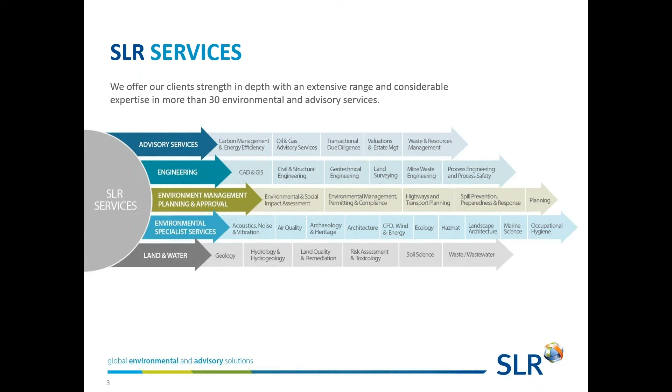So, safer by sharing. The aim is to share our experiences of providing support, in particular in the restoration phases of quarrying. So restoration design to reduce hazard and risk, whether that's landform, surface features, land cover, habitats, water bodies, and then after-uses - ecology, agriculture, forestry, recreation, waste, built environment type after-uses - but also to think about management of those construction and landscaping works, again to reduce hazard and risk. So typically earthworks, soils, compaction, cultivation, seeding, planting, fencing, etc.

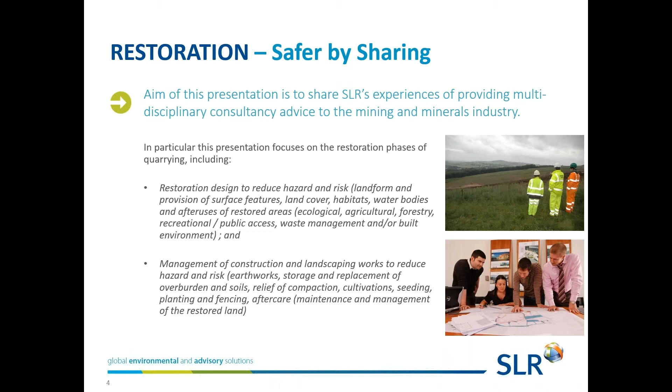As a starting point, the National Planning Policy Framework requires mineral planning authorities, when considering mineral extraction proposals, to ensure there are no unacceptable adverse impacts on other things, human health or aviation safety, and that there's provision for restoration and aftercare at the earliest opportunity and to the highest environmental standards.

That policy is transferred into local plans and decision making by authorities, and all of the mineral workings quarries have a planning permission to work, and that planning permission will either specifically mention a restoration scheme, or there will be a condition attached to the permission that says the site needs to be restored in accordance with a scheme to be prepared, submitted and agreed.

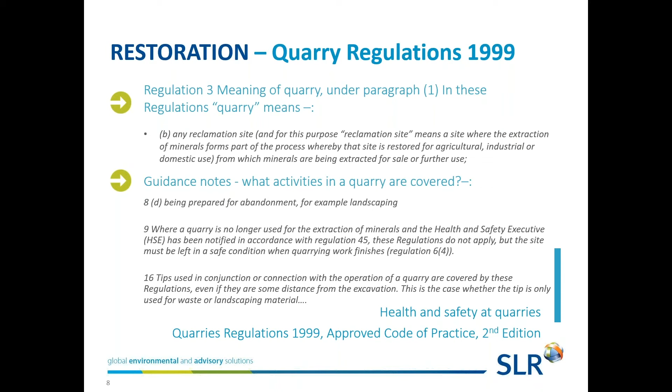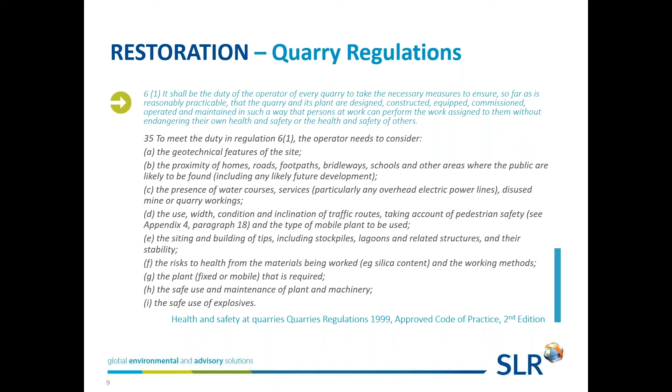So it's clear that restoration is covered by these things and needs to think about these things. It's helpful, and in preparing this presentation, I wanted to frame it with the regulations in mind. There's reference here as to what the operator needs to consider: geotechnical features, the proximity of homes and footpaths where the public are likely to be, presence of watercourse and services, traffic routes, pedestrian safety, building tips, the use of plant and machinery. We'll come on to those in the next couple of slides.

Restoration planning, design, implementation - it's a complicated, multidisciplinary, team approach. Health and safety is one thing we're going to talk about today, but actually there's lots of other considerations and input from specialists, whether that's the geotechnical engineers, or it may be ecologists or soils.

It may be the public generally, the local planning authority, the landowner or adjacent landowners, as well as the operations and the project management side.

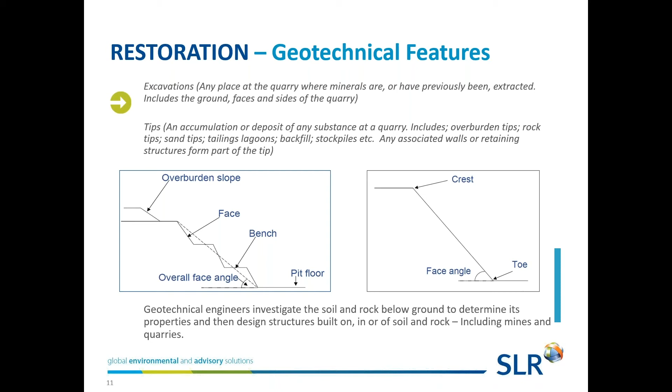Geotechnical features, as mentioned in the regs, include excavations of the quarry and how do we restore that, and then the tips, which might include overburden and solid tips, but also lagoons as well. The regs are clear that geotechnical engineers need to be involved and consider the properties and the structures.

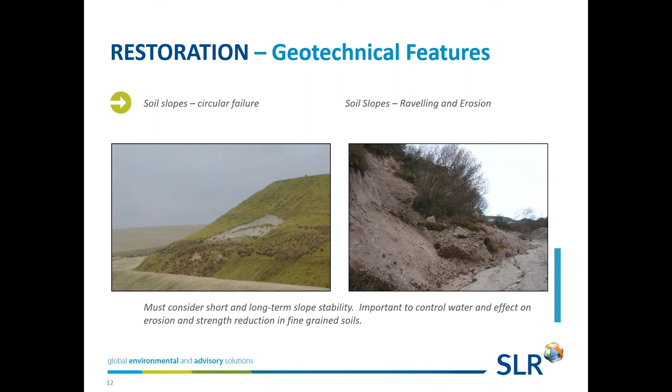Both of slopes, but also faces, benches, and the crest and toe, face angles, etc. So in terms of not just the quarry, but the restoration phases, we need to consider long-term stability as well, not just while it's operational, but as the site is abandoned and handed over to a beneficial use. What's the long-term stability? That's considering circular failure, raveling, erosion of slope.

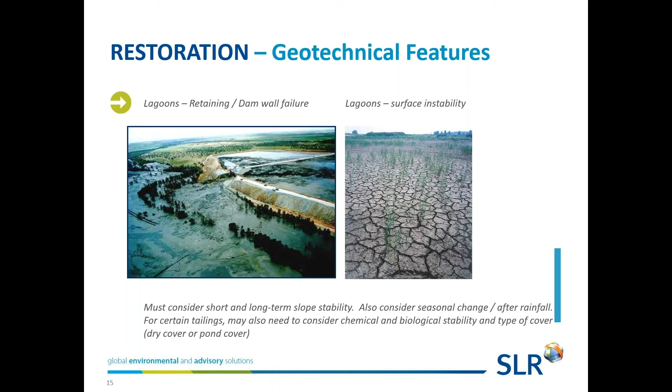Lagoons, again, if there's a retaining or a dam wall, if that fails, again, in the long term, consideration of that, and then the surface of the lagoon itself in terms of stability, and how those things may change as well over time or during the seasons.

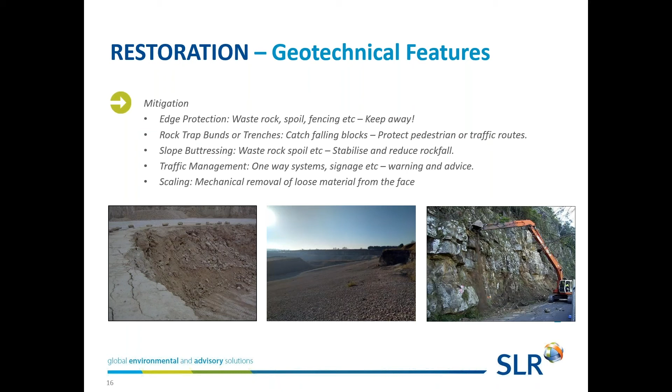There's mitigation during the working, which may include edge protection, rock traps, buttressing of slopes, traffic management, scaling, and it may be that the restoration phase as well is incorporated into the scheme as a whole.

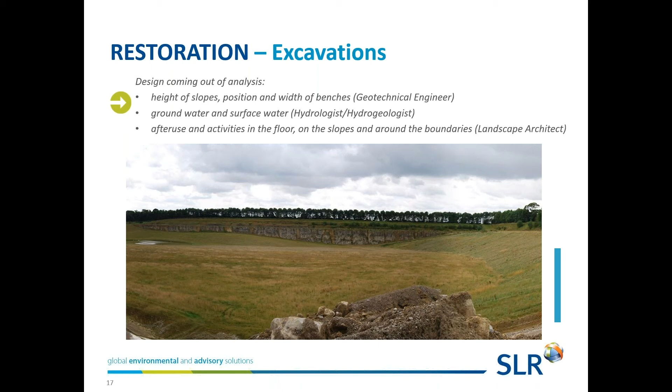But where we have got the exposed faces, perhaps there isn't a footpath, or there isn't something beyond there, and therefore it was less of a risk to have that open. That sort of thought process and discussion within the team would help to identify what material goes where and what's considered more important or more of a risk.

So for hard rock faces, final restoration blasting is often considered and put on the table as an option, particularly in visible sites, or a national hard rock quarry in a national park, which is quite visible. The idea being that the production faces are broken up, and the regular banding, the appearance of a quarry, is reduced. It becomes a more naturalistic hillside.

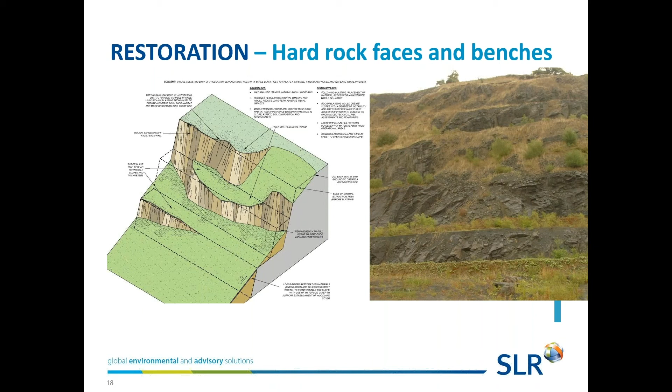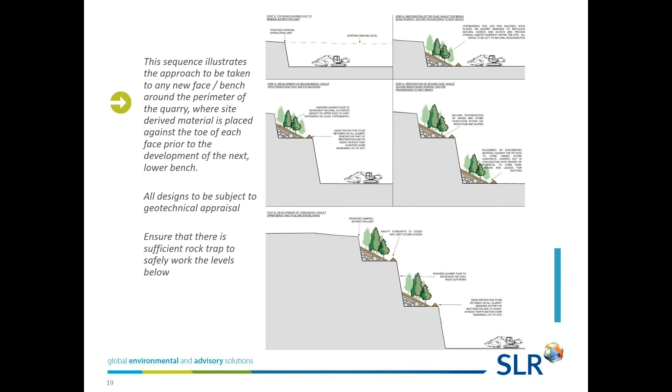The first bit would be the first bench. Step 2 would be to place material against the worked-out bench. Once you're at the boundary, step 3 would take the next bench down, then placing material again, and then the next bench down. This is a more controlled way of delivering restoration while minimizing the land take.

So the disadvantage, and again within a multidisciplinary discussion, is the appearance of more regular banding. It's more obvious that it's a quarry.

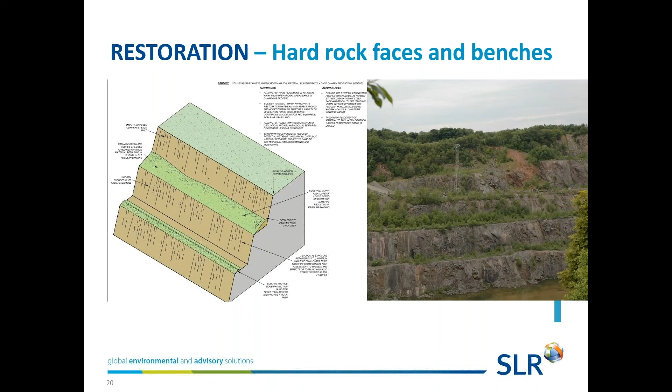It may only be a temporary thing of visual consideration as well. The advantage with this is that the rock traps all remain in place.

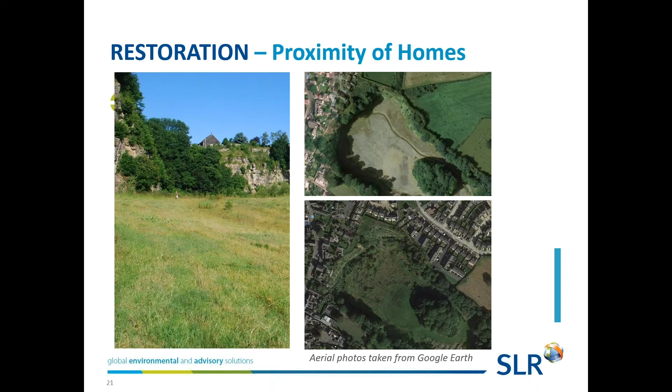Did the housing development consider that there was a quarry there with quarry faces, and how were those hazards and risks taken into account? So there are questions there.

The other situation I was reminded of was from the BBC News website. There was a housing development put into the bottom of a quarry as part of a built environment restoration. It's not one of our jobs, but we'd seen the news reports.

After heavy rain, there was a landslide of the quarry faces and the gardens were buried in mud, as reported. There were no injuries and the houses are still there. But clearly, when putting housing development either at the top or bottom of faces, there needs to be consideration of long-term stability, the hazards and risks, and mitigation measures.

The regs talk about how, as part of restoration, diverted footpaths may be reinstated through parts of the site, quite often with rights of way that the local authority will want back on the same route. And of course, the landscape will have changed, even after it's restored and soil has been spread in the bottom of a working, an excavation, or over a tip.

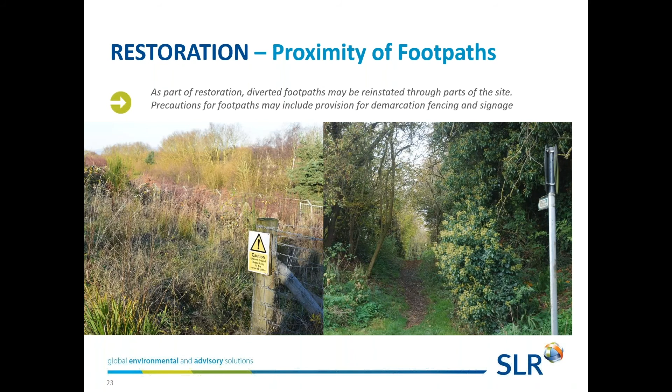There may be some new hazards in faces and slopes that weren't there before. So how do we manage that as part of restoration? Do we have fencing or signage, or some other features?

Barriers themselves are covered under the quarry regulations again, with requirements around boundaries being properly maintained and suitable for discouraging trespass. Or as we move into the restoration phases, should those requirements change?

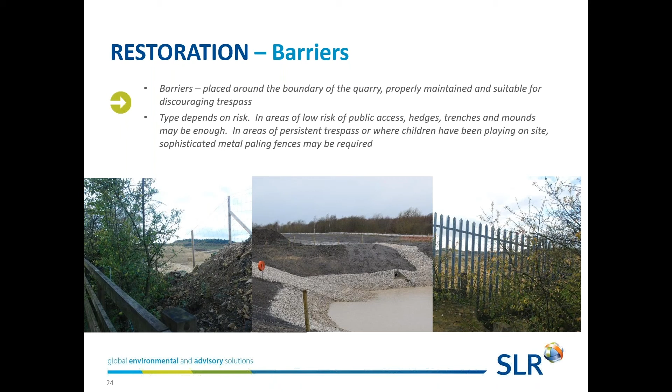I've spoken to planning authorities that have said they want the old palisade quarry fencing removed because they want a more country park feel, so they want timber fencing instead. There may need to be a risk assessment and discussion about whether that's appropriate, depending on the state of the site and the considered risks.

In terms of tips, again, the key theme is design coming out of analysis. What does the geotechnical engineer say? How much material have we got? What's the area of land that's going to be covered? What's the maximum height, and what sort of gradients will be stable in the long term?

Again, the hydrologist will come in and talk about surface water and runoff considerations, and we'll be blending those ideas about after-use and activities on the slopes around the boundaries, and how the tip appears in terms of its skyline and profile in relation to other hills as part of the design.

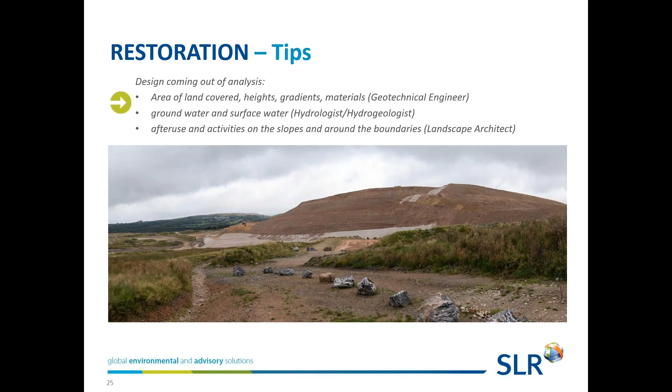For restoration of quarry lagoons, again the key theme is design coming out of analysis. That's input from a geotechnical engineer on the construction of the walls or structures retaining the tip or lagoons, groundwater and surface water variations, and how that might influence the character of that part of the site, from a hydrologist.

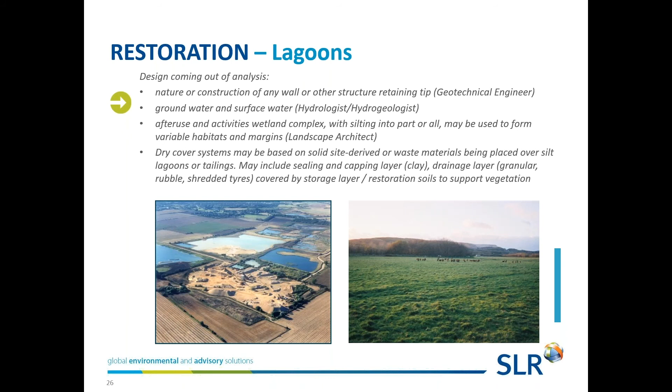After use and activities, if it's a wetland complex, material may silt into part or all of it, forming more variable margins and habitats within the water body. Or it may be a dry cover system, spreading material over the top to stabilize that surface with different capping layers and soils to support vegetation and integrate into the landscape.

Dangers of swimming are worth noting within this topic - the MPA have the Stay Safe campaign. Quarry lakes see 5 fatalities each year on average, mainly members of the public at disused sites. The Stay Safe campaign provides education and raises it as an issue with local communities, alongside site-specific management of risks, monitoring, barriers and fencing.

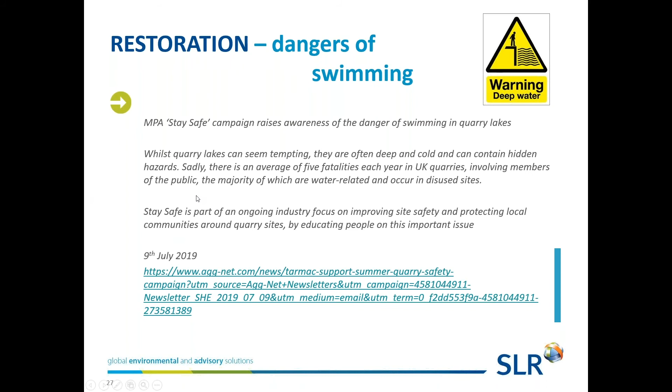The water body design can contribute to safety as well - that may be the design of shelves to create safer margins. A shallow slope or margin would be safer than a steeper slope where people might get into difficulties and struggle to get out. Variable edges will improve aesthetics and ecological value too. This sits alongside ensuring good access for emergency services, maybe life buoys, scramble nets, warning signs, and demarcation within the water itself.

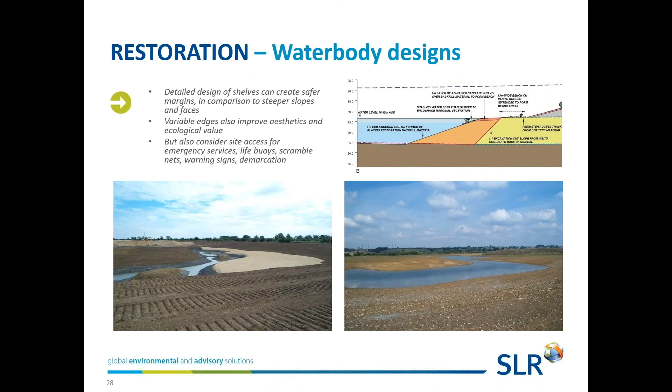Then there's aviation safety, which is mentioned within the National Planning Policy Framework - the threat or risk of aircraft colliding with large birds or large flocks of birds, and what an appropriate mitigation approach would be. The MPA again has some good guidance on this.

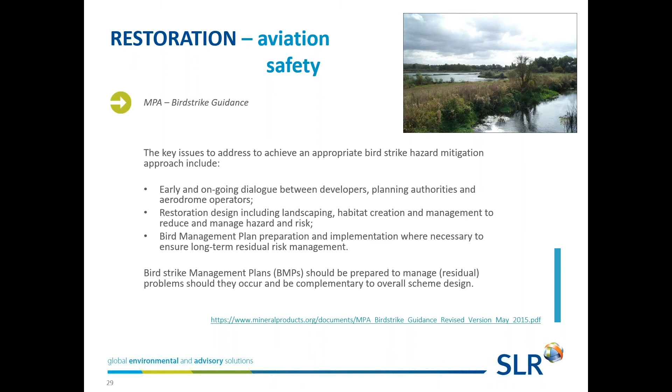That guidance talks about the restoration design - how landscaping, habitat creation and management can manage the risk, alongside other interventions within the bird management plan. The higher hazard is a large area of open water, whereas lower hazard is smaller water bodies with steep banks, scrub, fringing reed beds, wet woodland, and no islands.

The image on the left is one of our drawings where we had what would have been a large body of water, but through the use of overburden and pushing up clay from the floor, we were able to create causeways to break up that large body of water and plant it with woodland to enclose it. These aviation safety considerations are only identified during the planning process within safeguarding areas of airports or certain locations - not all wetland restoration sites have this constraint.

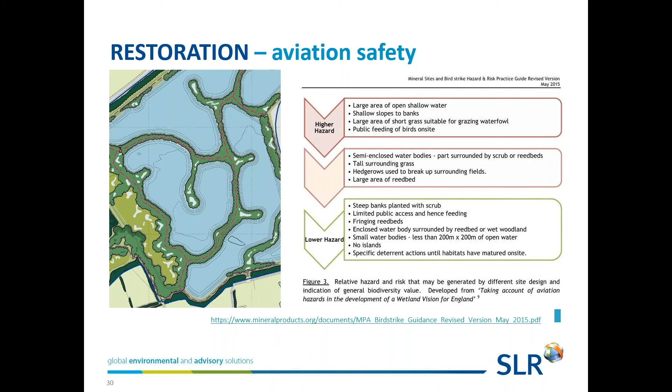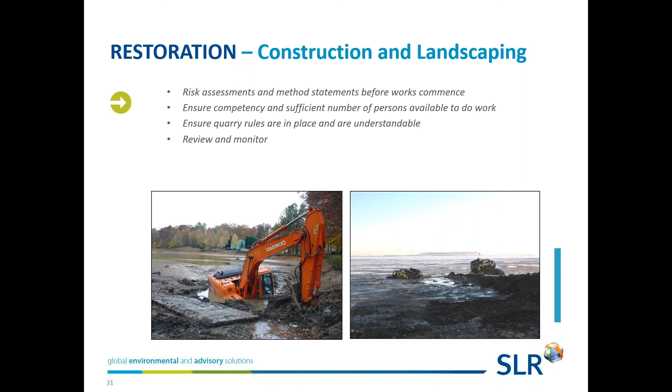Moving on to the physical work of construction or landscaping - things can happen at that stage. So having risk assessments and method statements before works commence, ensuring competency and a sufficient number of competent persons available, making sure quarry rules are in place and understandable, and that it's constantly reviewed and monitored to ensure things are done as safely as possible.

As an example, in December 2018 a contracting firm was fined after a tipper driver was fatally injured when his truck overturned on a stockpile. The works were raising ground levels using reuse of spoil from site - effectively restoration work. The HSE provided a report and recommendations, which is essential reading to make sure we're considering this when we review risk assessments and organise work.

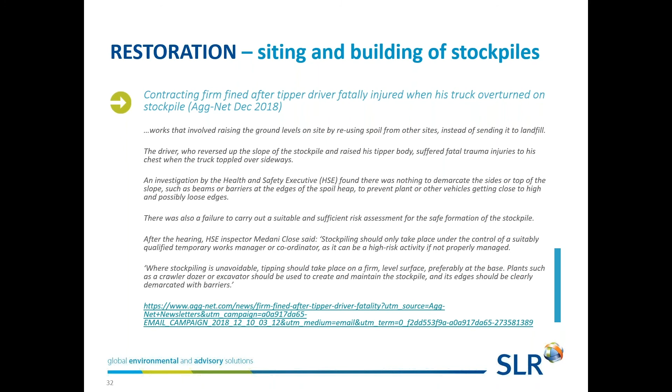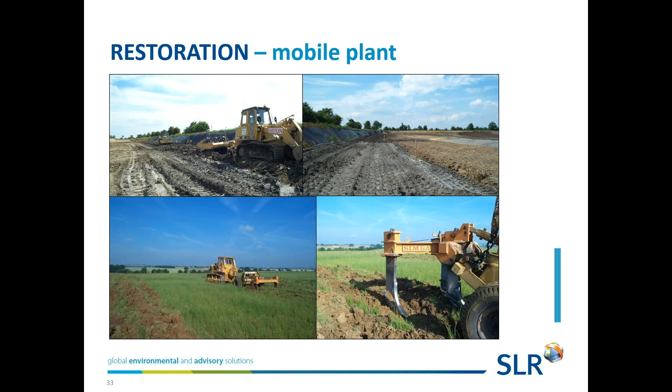Mobile plant is again involved in restoration - there might be big dozers pulling compactors or tines for decompaction afterwards with agricultural restoration. In September 2019, a groundworks firm was fined for safety failings after a plant driver requested the assistance of a security guard working for a separate company to remove a trailer from a bulldozer while the machine was operated by the driver.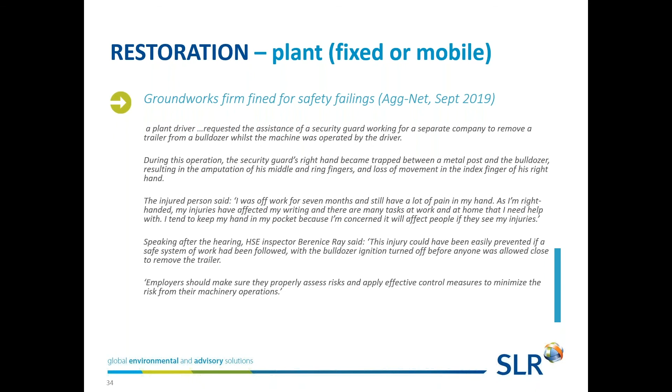Another example from September 2019: a groundworks firm was fined for safety failings. A plant driver requested the assistance of a security guard from a separate company to remove a trailer from a bulldozer whilst the machine was operated by the driver. During the operation, the security guard's right hand became trapped - the sort of thing that might happen during restoration or landscaping work. The HSE provides a commentary, report and recommendations, so make sure we're assessing the risks and have control measures to minimise those risks from machinery.

Again, the Quarry Regs specifically talk about presence of services, so that's overhead lines, but also buried services. Figure 9, taken from the Code of Practice, sets out how we protect vehicles. The bottom left photo doesn't have that protection in place, and that was moving soil from one part of a site to another.

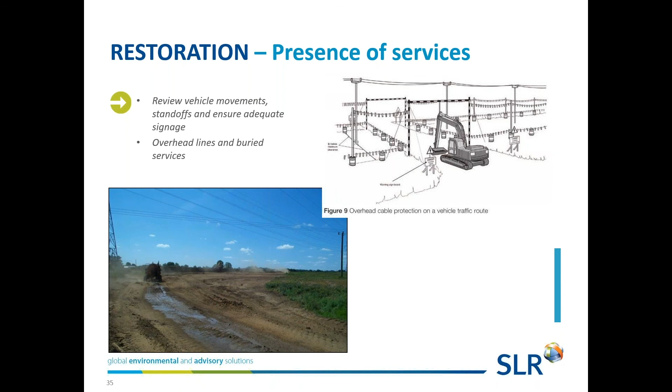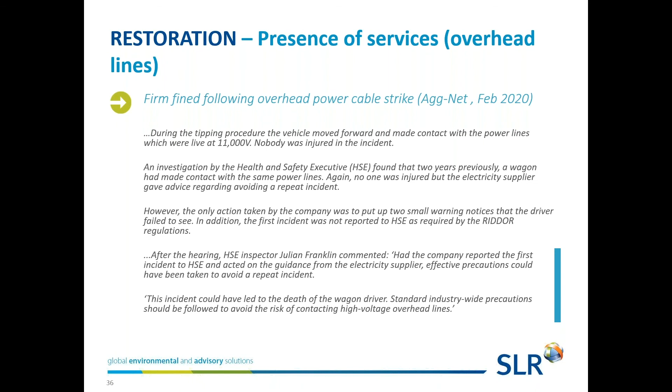February 2020, you'd think this was fairly standard, but again, an example where a firm was fined following an overhead power cable strike. It's important that managers are thinking about these, making the right risk assessments and putting the right provisions and precautions in place.

So, pedestrian safety - again, a fairly key one for SLR in particular. Our consultants will visit sites, operational sites or restored sites, and we'll quite often be walking around.

So what's suitable PPE do we need to consider? What traffic is happening, what works or other activities are nearby, the nature of the ground, works proposed - would be signing in and checking in with the manager just to find out the latest information.

For example, full PPE on the left-hand photograph - full orange, a white helmet - and you can see the earthworks plant at the right-hand side of the photo. So that's clearly operational. The bottom right photo shows newt trapping within a non-operational part of the site this time.

So clearance in advance of entering areas - the PPE may be different in that situation. Obviously, there are gloves for handling animals, and high visibility, and again, the PPE and arrangements shown at the top right.

So this is an aftercare site. We've got slopes, buttress slopes, agriculture in the bottom, and then tree planting, with inter-row strimming between that planting area. The PPE in that situation is a hard hat, face guard, and gloves.

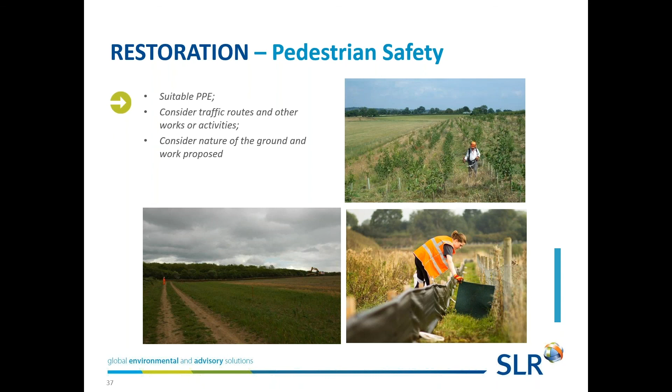But again, as sites move into the restoration phases, the hazards change. Although it's interesting, and again, this idea of review and monitor and share - really, safety by sharing.

So I was walking over a restored site recently and stood on a metal piece of rebar that was poking out of the soil. It went up through the side of my welly and sock, didn't puncture the skin, and there was no injury, no pain as such. So I reported it as a near miss on our system.

But it was a restored site - it had been regraded and soiled. I'd been going down there for a couple of years with full PPE and steel toe cap boots and midsole. But it had gone beyond that.

It was now into a new phase where it was having tree planting and aftercare, with an aspiration or thought that it'll go to the public, etc. So again, it's an interesting thought for us - what's the correct PPE? At what point do we change?

And we make those changes and say it's okay to walk around or access with certain clothing or a certain way. For that one, we're going to go back and do a sort of metal detecting and check-over to see if there's any other metal poking out anywhere else.

But again, we had a conversation with a colleague, and they said they'd done something similar and stood on a piece of timber that had punctured their footwear as well - a sort of timber stake. And of course, that wouldn't be picked up with a metal detector.

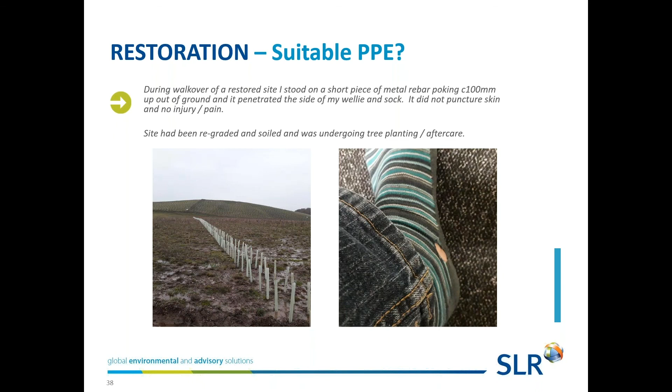So the purpose of today and the webinar today was just to share our experiences and to say we think about this all the time. It's constantly evolving, and we want to work with colleagues in the industry and be as safe as possible, really. And that's just our safety scheme.

Okay, well, thank you very much, and I hope that's been interesting. And happy to discuss any thoughts or feedback on the webinar today.